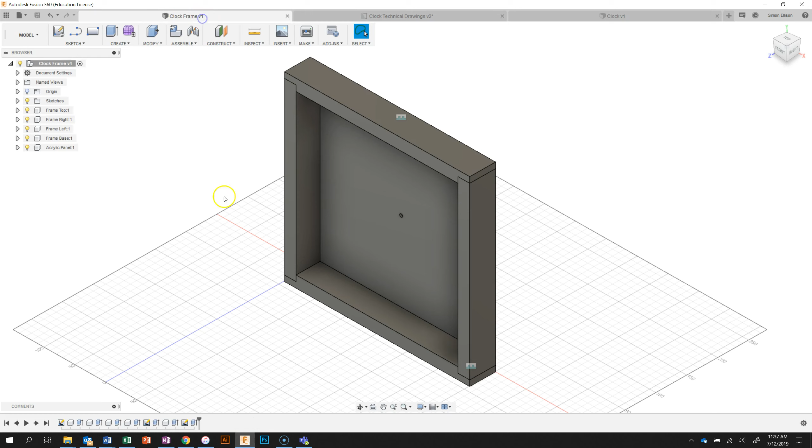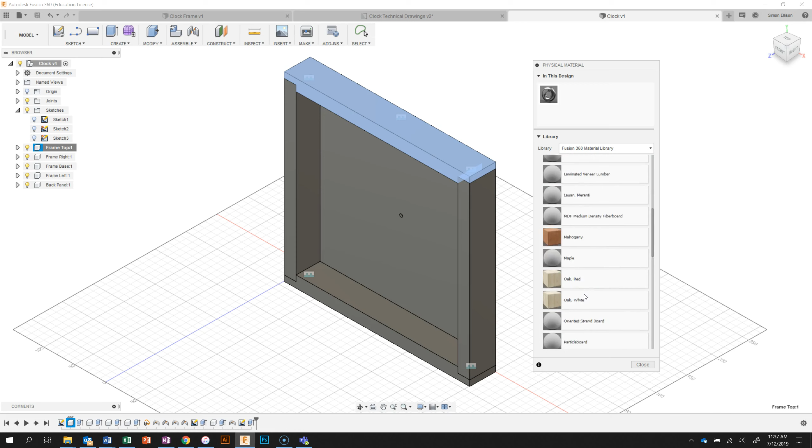Going back to the clock, to start with I'm going to right click on my frame top and go down to physical material. We'll get a dialog box pop up like this. In this dialog box we have heaps of different types of materials. We're going to go down to wood, and scroll down that list until we see pine, radiata.

We're going to drag and drop that onto the top. It's now up in the top of our design area. We'll drag and drop that down onto those other components. So that's the 4 timber parts of our task.

Now we're going to make the back plastic, in some acrylic. I'm going to go to the plastic menu, find acrylic, there it is. I'm going to drag and drop that onto the back panel. So now we have acrylic and pine radiata as materials in this design. If we're happy with that, we'll click close.

And it's now starting to look a bit more like the clock should. The very last thing we can do to make it look even better is right click on our frame top, click on appearance. We'll wait a moment. Now under appearances, this is where things get even fancier - under wood we've got wood in brackets solid, and finished woods, and we now have some different material names. So we've got 3D material names here.

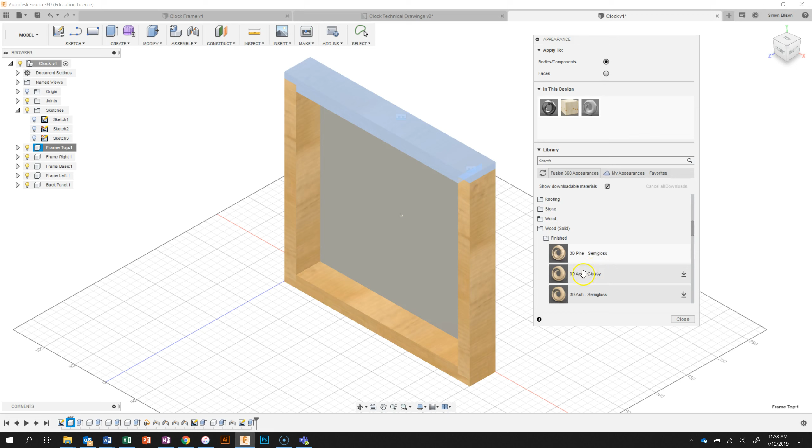And what we want is 3D pine semi-gloss. Now yours may not have been downloaded, you just need to click that little download button if you are after it. If you're ready with that, you can click and drag it onto that component there, and as long as you've got bodies and components ticked up here, it'll go and add it, and you can go through and do that for all of those pieces, like that.

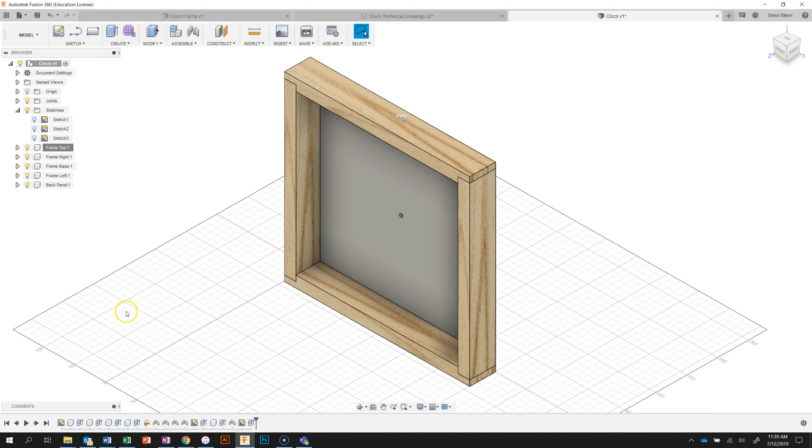So now we've set the material, and we've also set the look of the material, so it's looking exactly as it should for what we want it to be. We can click close now, and that's our clock frame basically done. I'll just hit save on this one, and it's going to ask me what version. I'm just going to say finished now for my version, and click OK. So there's my clock face and frame.

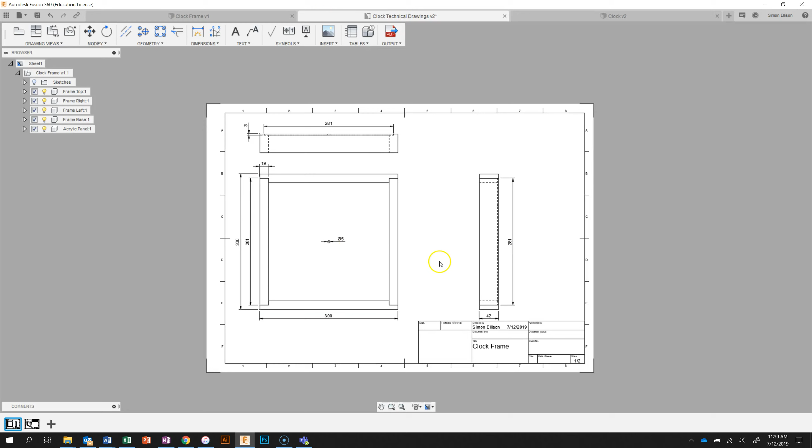Last task is for you to create the technical drawings, which is these ones here, and that's going to be in the next video. So at this point in time, make sure you've taken a screenshot and you've put that into OneNote.

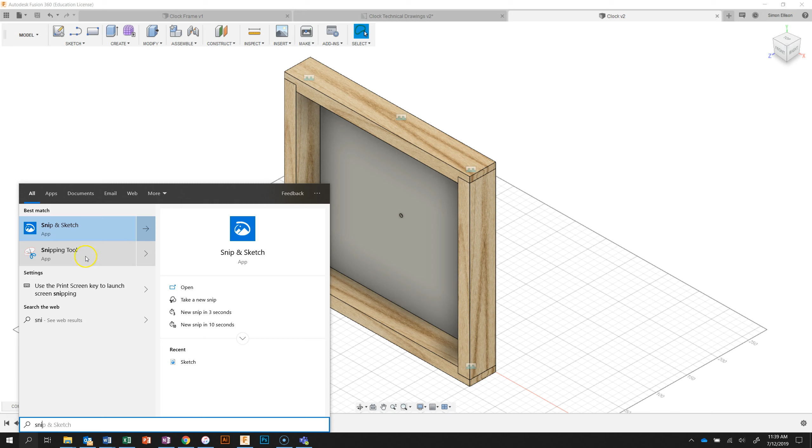I'll just click exit on mine. Don't want to save mine. So in the next video, we're going to see the technical drawing stage.